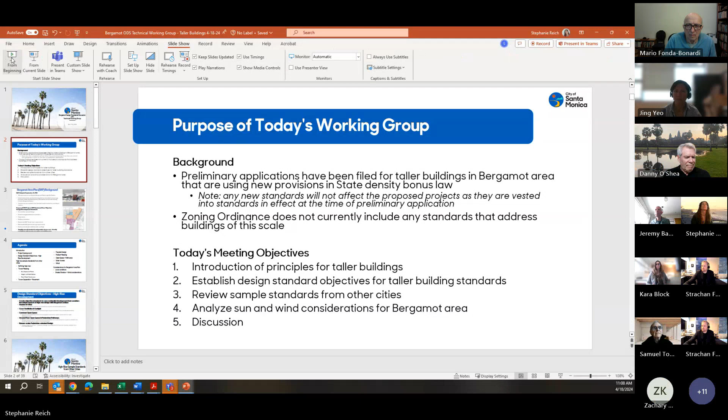Again, welcome to the working group today. Today we will be focusing on principles for taller buildings. Some background for what precipitated this session: we have 4 preliminary applications filed for taller buildings in the Bergamot area using new provisions under state density bonus law. They're in the kind of 24-story range.

I want to note, because those are preliminary applications, any new standards we develop will not affect those proposed projects, but they are informative for the discussion. They are vested in the standards we have today. Our zoning ordinance currently doesn't include standards that address buildings of that scale. We haven't seen buildings proposed like this for quite some time, I would say decades in the city. So it's not really addressed in our zoning ordinance.

That's why we are introducing this discussion today. I want to note we don't have anything set in stone, we haven't really developed standards, and this is truly an introduction. It's very much an informative session today. We're looking for some very high level feedback on some approaches that we'll be sharing today.

So you can see our meeting objectives. It's the introduction of these principles, establishing objectives, so outcomes, like what is it that we want to achieve out of these buildings, and what standards would potentially support that. AECOM today will be reviewing different approaches from various cities who obviously have taller buildings, have experience in this arena, and it's helpful to learn what they've done, what the outcomes have been.

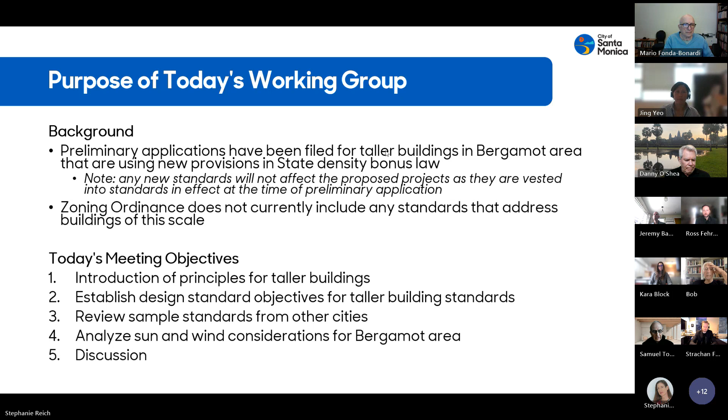For the benefit of everyone, some background on the Bergamot area plan project. The Bergamot area plan was adopted September 2013, so over 10 years ago, and it was of its time and place. It was intended to encourage mixed-use, transit-oriented development around Bergamot Station, not solely focused on housing, but very much based around the creative arts and references to the area's former industrial past. But fast forward to today, and it's really not resulted in the transformation that was expected out of the plan, for a variety of reasons.

So where we are today is, through the housing element process and not seeing that plan develop as expected, Council directed creating more incentives for the production of housing. One of the barriers we've heard from applicants trying to propose projects in the Bergamot area plan is that the standards are rather confusing and very difficult to implement. The community doesn't understand them very well, it's hard for developers to understand them, and from a staff perspective, it just doesn't behave like the regular zoning code.

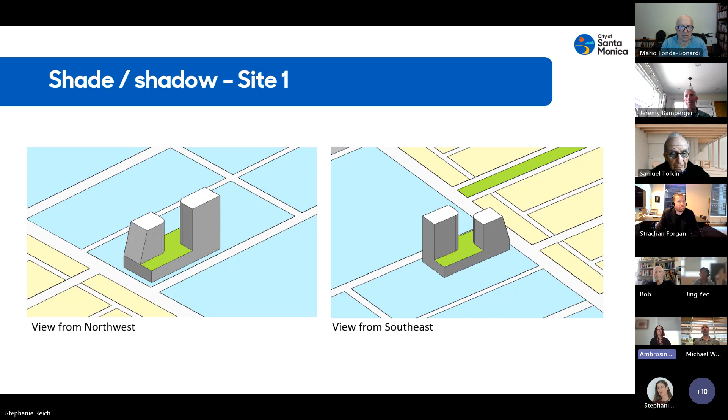If you're looking at the on-site open space, for example, this is a configuration of podium level open space. You can see that if you're on the northwest corner of the site, you're pretty much in the sun all day long. If you were to put an open space on the southeast portion of the site, you'd be in the shade most of the day. So it helps us think about where the best location might be for on-site open space. Sun is great a lot of the time, but sometimes in the summer you want to be in the shade too - it's not necessarily saying you want to be in the sun 100% of the time, but just understanding what the shadow impacts are.

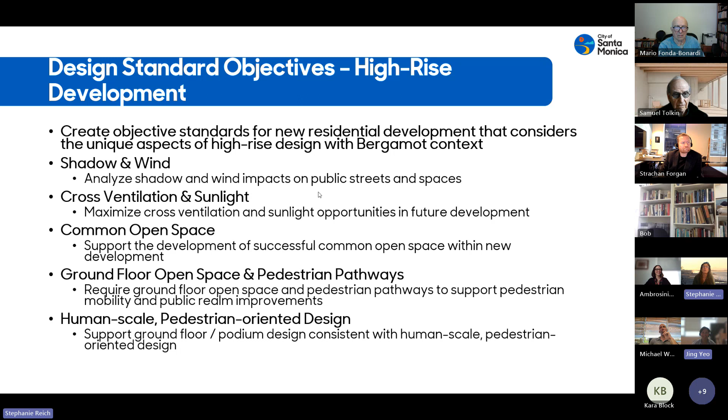Sounds like these are fine. Great, okay. So maybe we want to just go through the things that we presented one by one. Yeah, no, I'm getting to that.

I think you're muted, Kara, if you're talking. Sorry about that, I was. You think I should know by now.

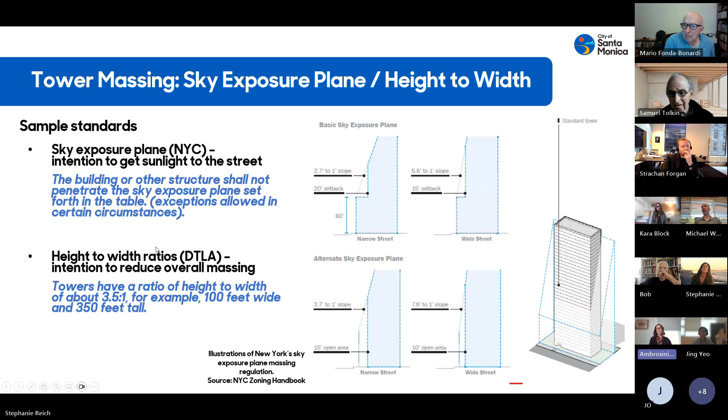Yes, you're right that the tower spacing decision is very important based on the typical lot sizes in an area. So like the example we showed for site 1, it was a smaller site, and I think the tower spacing was about 50 feet.

In areas like Vancouver and downtown LA, the block sizes are quite large and the developments are pretty large, so having an 80-foot tower spacing is feasible there. As we move into the next stage of recommendations, we should definitely look at lot size and how that relates to what might be feasible, like whether you're trying to do 2 towers versus 1 tower and how that relates to floor plate size. We didn't do an assessment of lot size in those particular areas and how that might have impacted the 80 feet, but presumably it was influenced significantly by the types of sites in those downtown areas.

One other idea we talked about at our first workshop was daylight planes, maybe not having them on the south, southeast and southwest, but only on the north, northwest, or northeast, as a way of allowing buildings north of the subject property to get a little more daylight plane. So the daylight plane would be tuned to which way the building is oriented. I think that would be a valuable addition.

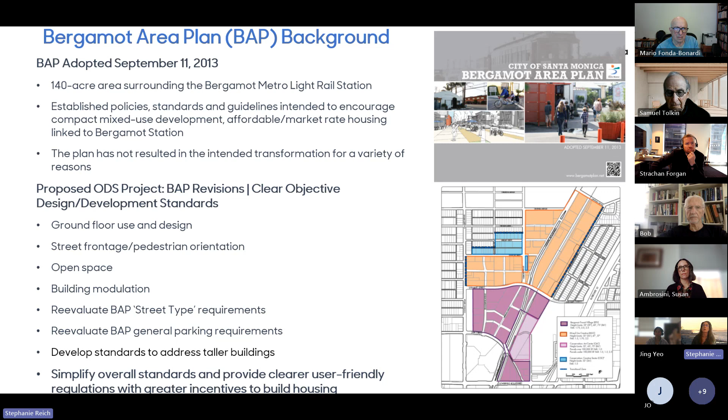As Jing was saying, when we did the Bergamot area plan, we didn't anticipate buildings more than 20 stories tall. So this is a really good opportunity for us to look at what that might look like for Santa Monica and how we might want to shape those towers.

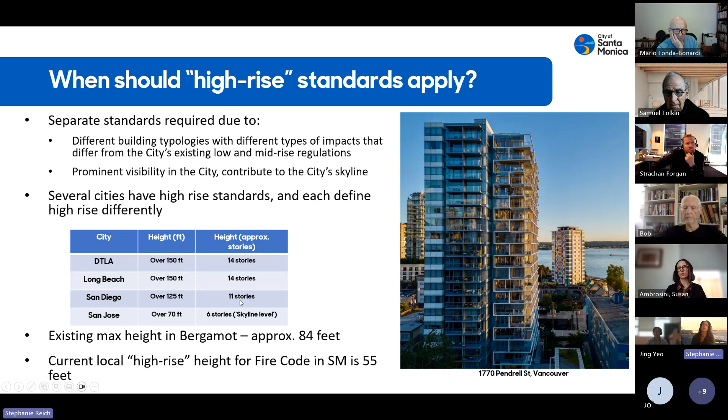So what we've heard so far is that there may be agreement on providing a definition of a high rise, perhaps 11 or 12 stories. But this is a lot of information, and we anticipate you'll want to think about that.

And then Jing, do we want to talk a little more about tower massing and how that is regulated or might be regulated? Yeah—but I see Strachan has his hand raised.

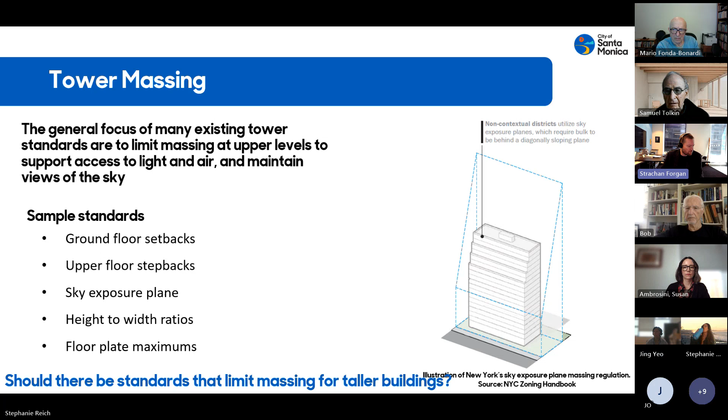This kind of dovetails into moving to discuss the floor plate size slightly. On your slide, I think you mentioned Vancouver has a maximum floor plate size of 5,500 square feet—I actually think it's 6,500 square feet, so you might want to check that. But that's helpful, thank you.

But I think it's a bit of a dangerous precedent as well. I mean, the skyline in Vancouver looks spectacular, but they have very different building codes there. When San Francisco did its Rincon Hill plan, probably a couple of decades ago, they looked to Vancouver to figure out if there was a floor plate size that made sense. But when they analyzed the code in Canada versus the CBC in California, there are elements we have to include—like stair separation, fire service access elevators, smoke vestibules, and ADA requirements within the unit—that make the floor plates less efficient in California versus Vancouver.

So in San Francisco, they set the floor plate size for Rincon Hill at 10,000 square feet. But the feedback after that district was built out with towers was that still wasn't quite enough to make an efficient floor plate in the 80-ish, 83% efficiency range. So San Francisco has now moved to 12,000 square feet as the standard floor plate size in the Central SOMA plan and some of the newer plans for towers. Just wanted to give you that as a data point.

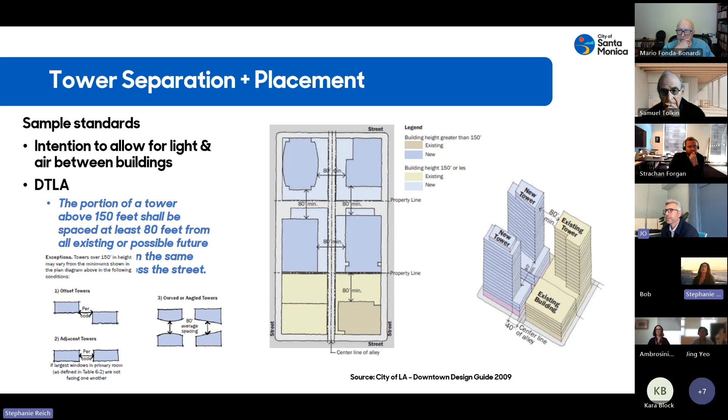So the point of the tower separation is to try to make sure we're getting light down to the ground, and that when you look up, you don't only see building, that you can still see sky.

Yeah, from my perspective, I think the tower separation does make sense. I think like the example shown, those towers were all way too close together, and it just really needs to go up so that the towers are further apart and you have less of a shadow impact. So I think having some standards there.

I think the challenge is just the size of the site, and some of these sites may not lay out and be exactly specific to fitting a standard. So if there's any way to have leeway built into how that's treated, or the minimum not being too restrictive. But I think it makes sense to have some of those regulated, because it helps us with the layouts and what we need to go by.

Can I ask a question for Jesse and Strachan here? Just thinking about these standards, and like you're saying, feasibility plays in here. I'm wondering, if there were to be standards around floor plate separation, in the interest of mitigating sky exposure and sun shadow impacts, is there a maximum height limit? I'm thinking about that trade-off between the spacing between buildings and then going up to make up for the loss of units, just to make it feasible. Are you seeing a limit from your clients? I think that's something helpful for us to understand a little bit as well.

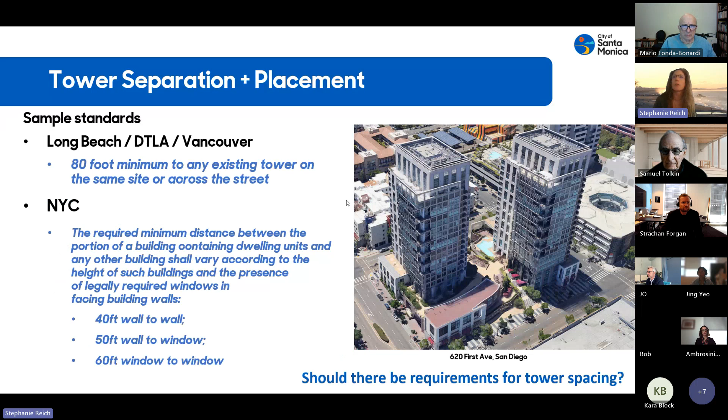Okay, thank you for that. So it sounds like tower spacing, and we understand all of these, we have to find the sweet spot so that they lead to feasible buildings.

Are we ready to go on to facade design? Is there a sense from the group that there's an interest in some facade design standards, potentially requiring some balconies, some vertical elements, something to give the tower visual interest?

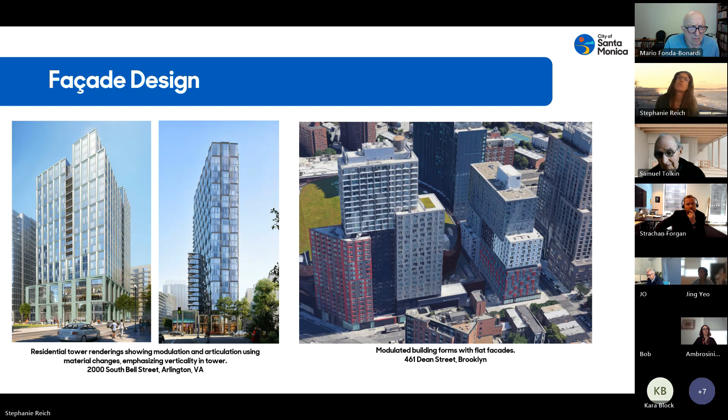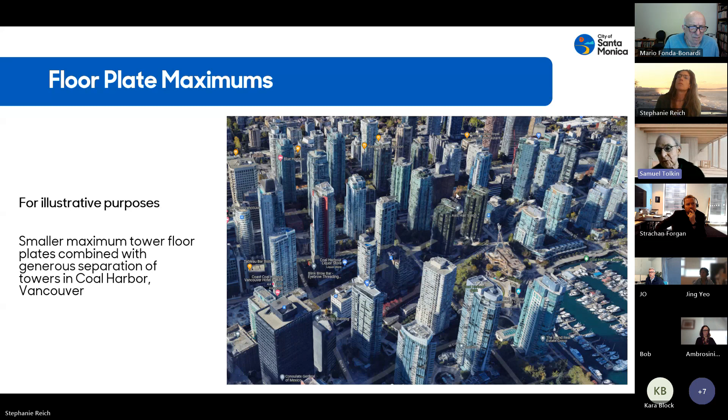Samuel: Yeah, I just wanted to say that I think we should be closer, if we're going to pick a size for a plate, to the Vancouver standards, and we'll get better quality given the lots that we have to work with, variable lot sizes. We'll get a better design from that standard or something closer to that than 10,000, 12,000 square feet. It's just my feeling. If you're going to put that requirement in there, we better be less than places like San Francisco, or we'll get better designs.

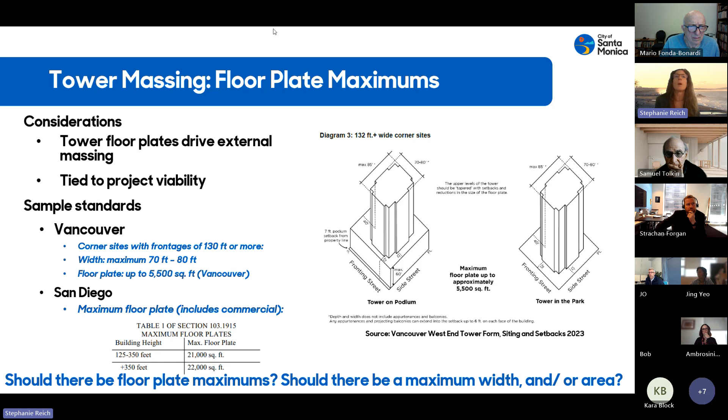Well, thank you for that. So for the group, are we ready to move on to tower articulation, facade design? Are there any thoughts on this section?

Bob. Bob, you may be muted if you're talking. We can't hear you. We still can't hear you. There we go. Oh, we hear you now, Bob, I think.

Relative to the last few comments about not just plate size, et cetera, these are all important factors, but I do want to know, based on prior projects that have occurred in the city, who amongst the participants here are under contract to design projects in the Bergamot area at this time. I don't think it's a restriction on their participation, but I think it would be useful, at least to me, to understand who's motivating direction here and for what purpose.

Anybody? Well, Bob, I don't know the answer to that, but I know others do. We have a variety of developers in the city, and we anticipate that the folks we have doing applications in Bergamot may not be the only folks who might be interested in doing towers in Santa Monica.

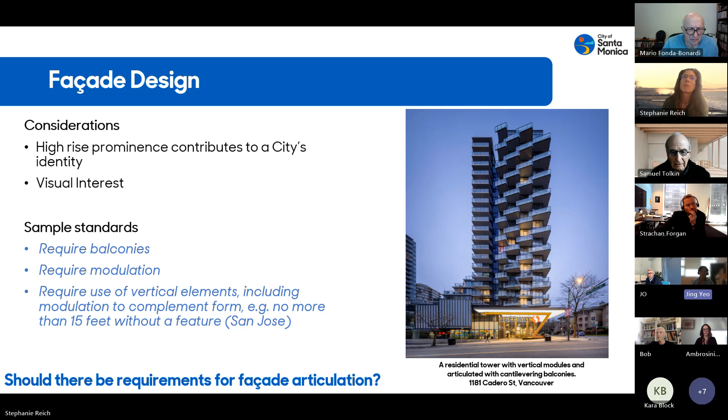We can keep moving through if not. So, podium massing maybe? Yeah, okay.

Podium massing. So what we've heard is that it would be good to have some maximum sizes for towers, definition of where the tower starts, and tower spacing. Towers often sit on podiums, and the podium is what we would relate to at the ground level, and podium size would dictate where we would be able to move through the Bergamot area.

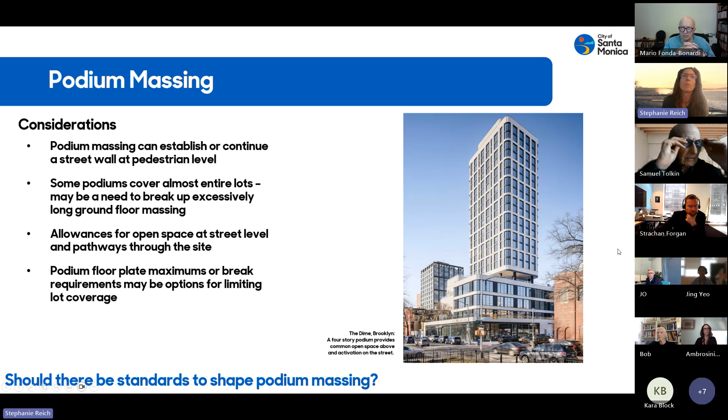As we'd like to talk a little bit about podium massing, do we have any thoughts so far on podium massing and podium size? I think, Stephanie, we want to point out here that as we were looking at this consideration, we were recognizing that this is similar concepts to what we've already discussed with respect to street wall standards, sort of what I'll just call the regular standards.

Especially when we think about even the potential for above ground parking through this project, we have developed standards in that regard. We thought there may be not too much different here, but we would love to definitely get feedback from the group on whether that is your thoughts around that, whether we should kind of circle back and take a look at this again with respect to this typology.

Yeah, so to clarify, I think that there's maybe we could put our principles or design standards into two broad categories. One is the size and shape of the podium and podium massing, potentially height, but we typically won't regulate that. And then the other is the street wall or the surface of the podium and how that interacts with the pedestrian.

So as Jing was mentioning, we typically have some good standards started for that latter set of standards, how the podium or how the design relates to the street and its transparency and what features it might have. We would also like to get some feedback on size of podium, because that's not something that we have.

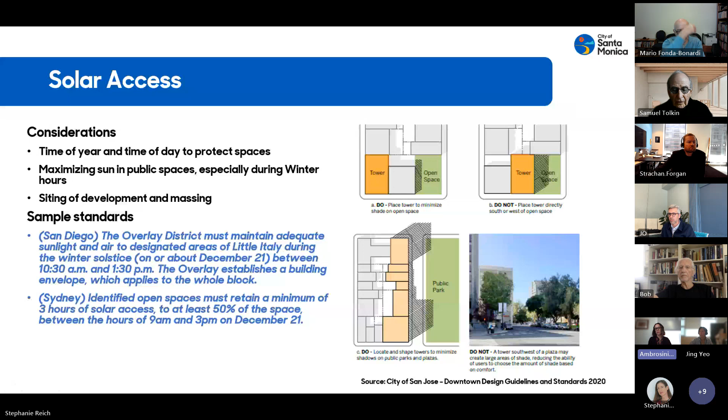It also wouldn't allow enough space within the project potentially to create a pathway through some of these, because in Bergamot, as we mentioned before, there are some very large blocks that would benefit from having some more pedestrian pathways, either for people in the public if they're open, or just people on site to navigate within the blocks. There are some partial pathways that exist. So really just thinking about that as a potential aim, and what your thoughts are relative to podium and podium size.

Any thoughts from the group? And also, what's certainly parking, but what's really driving the decisions to do a podium format versus entirely underground parking, and what the dynamics might be there related to feasibility and what counts towards FAR. So if you have any comments there, we'd welcome them.

Looks like Mario, you have your hand up. And George, we haven't heard from you yet. So Mario, and then George. Mario, we can't hear you, it appears. You are muted, Mario. Sorry about that.

What I was saying is that whatever standards we have for the podium articulation, it should be scaled to the height of the podium. If you have a 2-foot setback on a 40-foot high podium, it's virtually invisible. You're not going to see it. It's not going to work to define a segment or an edge. So whatever standards we impose, they should be scaled to the height of the object. That makes sense, thank you.

Thank you very much, George, you had your hand up? Yeah, my only comment here is with regards to these pedestrian corridors, the main concern obviously would be security, and if you're opening up your property and your development to the public, the responsibility to maintain that and ensure that it's kept safe is a big question. There's been some challenges in the downtown area and not so much in Bergamot, but you're essentially being required, if you have these pedestrian corridors, to give your property to the city. So I just would like to bring up that issue as far as who's responsible for maintaining the security of that area. Is it being taken as an easement for public right of way? In which case there should be some compensation to the property owner.

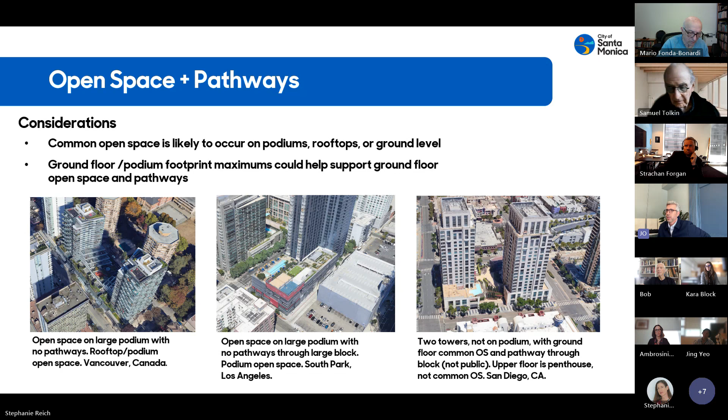That's helpful. Thank you. And then you wanted to talk about facade design? Yeah, and just on the ground floor, on the podium, how it meets the street.

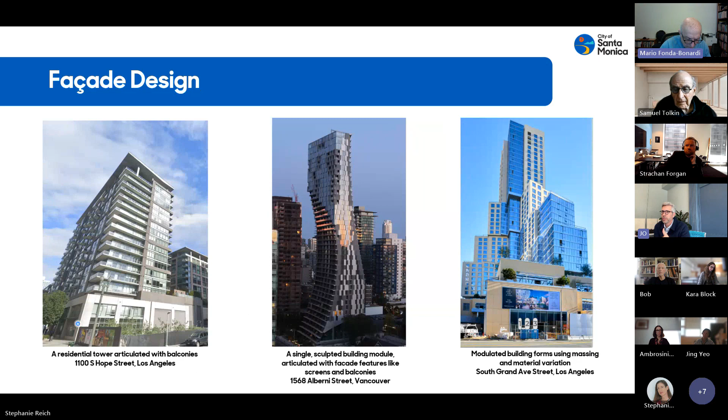I think one of the things I like about the Bergamot plan versus the downtown plan is that flexibility. There's the frontage line, and Bergamot gives you some space to create landscaping or other setbacks at entries, whereas downtown really requires 70% of that building to be at the frontage line, or you're not in compliance unless it's a code-required setback for an entry. I think having that flexibility is really nice, especially for that ground floor street level experience, especially on these bigger lots. I don't know if you were planning on changing those, but I do like Bergamot allowing us to be within a certain distance of the building frontage line.

So it's more flexible for you if there's a certain distance, let's say 10 feet from the frontage line, rather than a requirement to have 70% at the frontage line and 30% set back 10 feet. Because honestly, I think we struggle with that in terms of design. Meeting those requirements doesn't always give us the flexibility to create designs the city's happy with in terms of the pedestrian experience.

Just to clarify, I think you're talking about both dimensions, right? Not just the 50, 70, 80%, whatever that is of the lot frontage, but also the setback itself, so you might have a little flex. If the setback is a 0 lot line or 5 foot, you still have maybe 5 feet of flexibility in that setback. Because then we can bring design into it. If you want to have some outdoor space that sets back a bit further from the frontage line, but it still meets the spirit of creating that street wall, does it matter if it's at the frontage line or 8 or 10 feet back? You can still have that really nice experience, or more landscaping, that sort of thing.

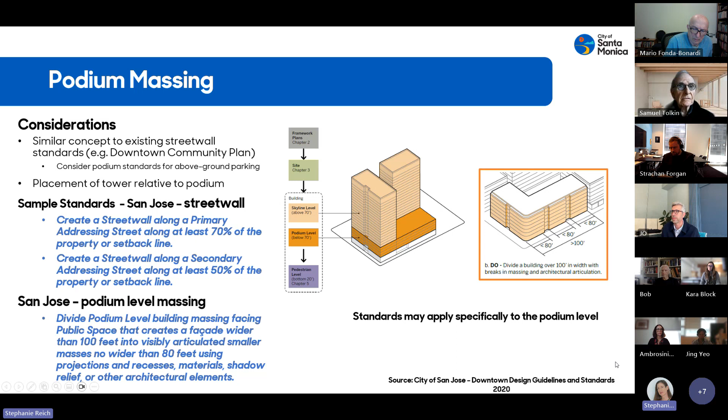So the average works better, you think, than the specific? Yeah, frontage, I can see that.

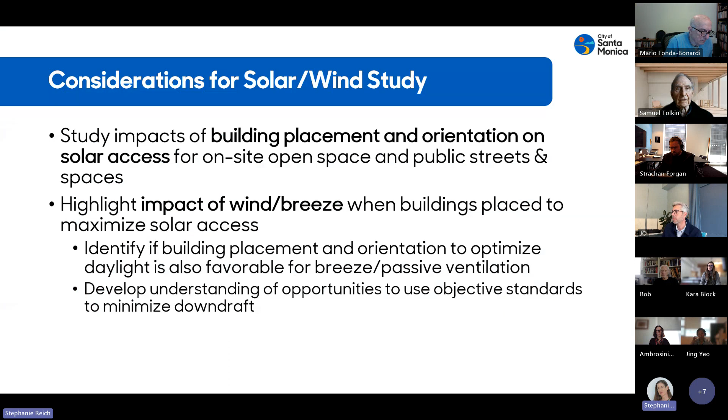Okay, great. So are we ready to talk a little bit about solar and wind? We didn't want to necessarily ask for wind studies, apparently there aren't that many wind consultants to go to. Solar studies are pretty easy to do. So Stephanie, do you want to talk about this, we do have all these diagrams. Did you come to some idea about optimum location and spacing? Well, we talked about spacing earlier, but location and orientation for shade, shadow, and wind.

Yeah, I don't have a recommendation at this point, but I'd be interested in hearing from the group about when you're designing your open space, what the potential shadow impacts are. Any thoughts on whether you're trying to typically maximize sun exposure, or in Santa Monica, also trying to include shade at certain times of the year.

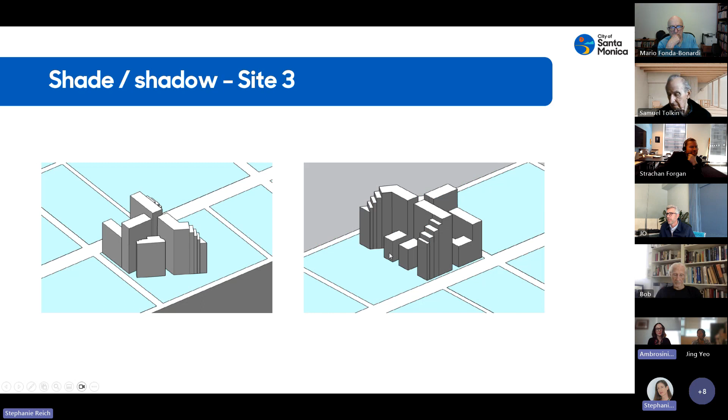Okay, well, we haven't had tall buildings like this, as Jing said at the outset, in quite some time. I think it's early for us to all be thinking about this kind of standard. It's possible folks on the call, and we're really grateful you spent a good portion of your morning with us, need to digest this information and come back to us.

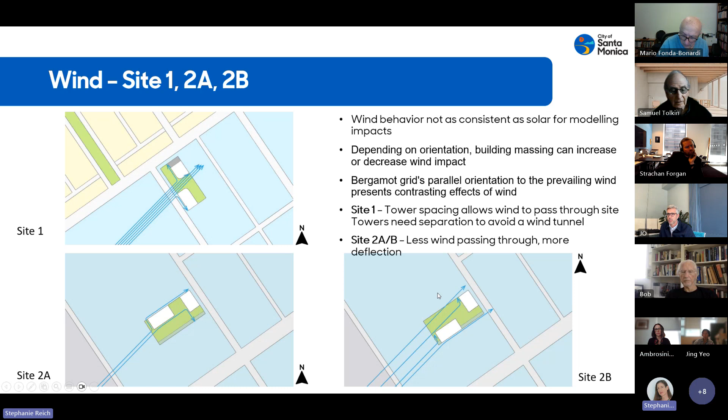Jing, do you want to talk? Is it time to talk about next steps? I would think so. On the shadow, go ahead. Just quickly, okay, on the shadow.

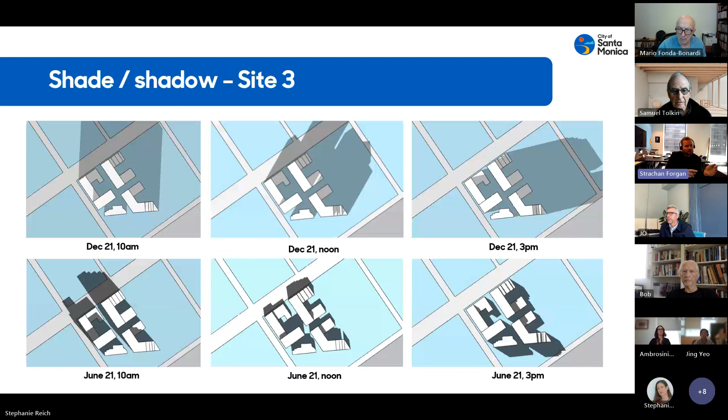If we looked at 2A versus 2B, 2B would be the preference because you're pushing, you know, more of the open space has got better southern exposure. However, often the building placement is driven by lots of different considerations, how it relates to the parking, the urban fabric. So we always try and optimize the exposure, but we're often balancing a lot of different competing criteria.

Yeah, so that makes sense. Shadow's a hard one to come up with as an objective design standard, because how much shadow is acceptable is subjective. They tried to do that in San Francisco, and it's been frankly a nightmare.

Well, I guess the other question is, are we at the point where it's preferable to have shade in the open space? Because sometimes the sun can get to be a little much. I'm very fair-skinned, and I always like to have a little shade.

I think also what we're thinking is that if towers or buildings that are rectangular in shape have their short side in the east-west direction, and the long side in the north-south direction, that might lead to more space for views. Susan, do I have that right, or do I have that opposite?

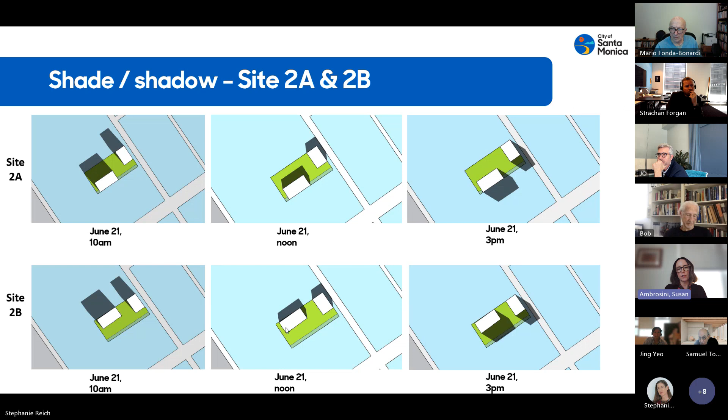Yeah, well, it's tricky because if you have the slender part facing towards the north, I'd have to look more specifically at where the mountains are exactly, but you might get better orientation with the slender side facing towards the ocean, because then you get the long side and the slender side facing the mountains. So potentially, but I'd have to look very specifically with the mountains in the foreground.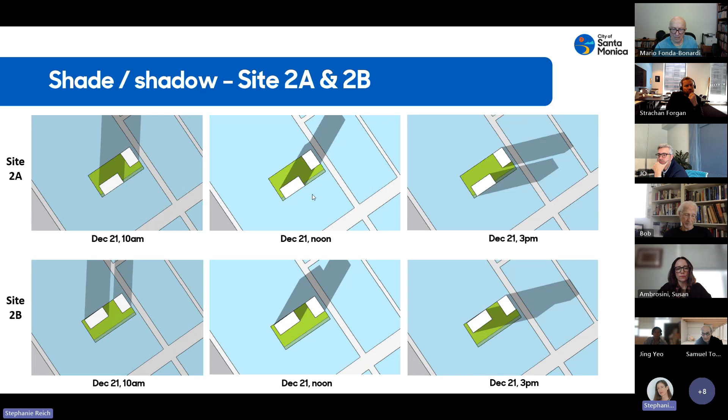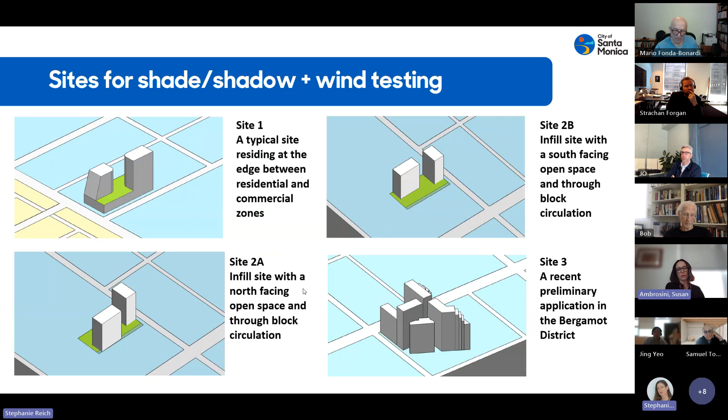But whether people are able to look out the side of their balcony versus just considering those that have the direct impact view of the mountains, for example. Yeah, I'm thinking it would be more for the space between the buildings rather than the occupants in the buildings, in terms of blocking their views. In terms of creating space in the north-south direction in a way. So that's maybe something we want to take a look at.